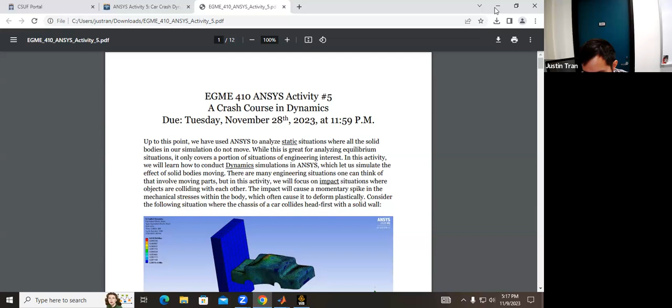Oh, that's good. Nothing to do with engineering, but what's it for? That's for the City of Vernon utilities operational training. Okay, he gets back there tomorrow. Yeah, that's good. So I've got to email him to test this. Okay, we have to take a test too, okay.

My cousin works there, or I've got two cousins that work there, and one of them texted me today. Hey, I got information for you, he's like, it's 100 questions. That's almost like a weeding tool then, like who's gonna put up with 100 questions, right? Yeah, and he's like, read up on homes, vehicles that are... He's like, know what a watt is, and megawatt. He's like, okay fine. He's like, that's good, there'll be a lot of uncritical thinking.

We had all day long. Yes, you do. So I am not worried. That's good. Is it, do you have to do it live or do they just give it to you and then I just email back? I would go and I'll go in live. Okay, now that makes sense.

Works out, we may not have to miss any school for it, cause that's coming up. Well, so I don't think, well for the faculty at least, we're not going to strike this semester. What I saw was the week after this break, it's only going to be select campuses. So Fullerton was not selected as one of the striking campuses.

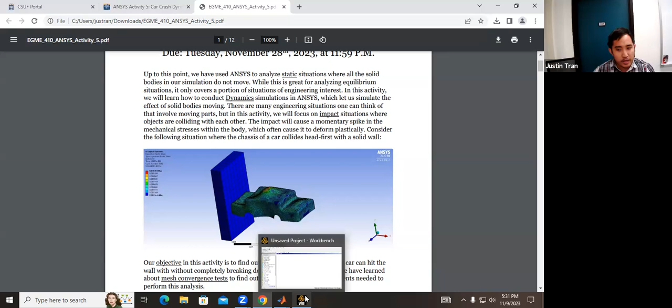Okay, you guys know the drill at this point, so if you haven't already, go ahead and start up ANSYS Workbench. It takes a couple minutes to do so. While you guys are starting it up, I'll give a little bit of introduction on the activity, and then we'll get started.

In terms of length, this activity is definitely shorter than activity 4. But because the dynamic simulations take a while, you're going to be just kind of sitting there and watching ANSYS run for a good amount of time today. Any questions I can answer before we get started?

Is the optional activity the grad student assignment? It's not—it's going to be part of the grad student assignment, and it will be part of the final project. We'll talk about the final project after Thanksgiving.

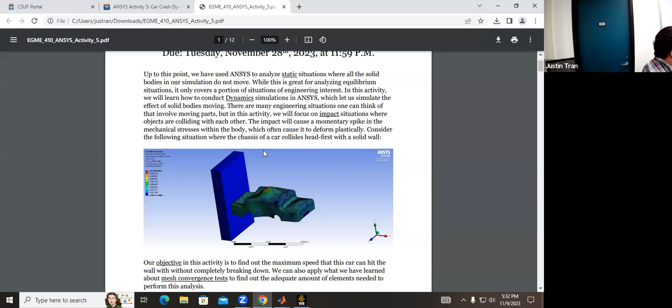Yeah, you guys have enough on your plate—ANSYS activity, problem set, and midterm—so I didn't want to overload you guys with the final project just yet. Also, the due date for this activity is not until after Thanksgiving, so it's going to be Tuesday, November 28th, the Tuesday we come back from Thanksgiving.

All right, any other questions before we get started? Okay, so this is the activity here, and just like before, not only do you need to start up ANSYS, but make sure you go to Canvas and download the CAD file.

For the CAD file, I'm giving you 2 options, just because one year—I don't know if it was just the version of ANSYS we were using—but some people had trouble loading the file. So I have both an IGS version and a step version of the CAD file. You only need one, but if one doesn't work, check the other. For most people, the IGS file should work, but if you're having trouble or errors loading it, you can use the step file instead.

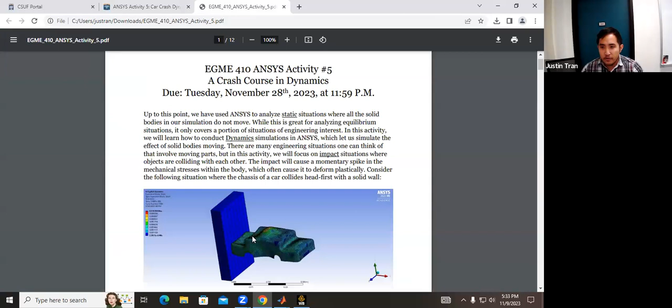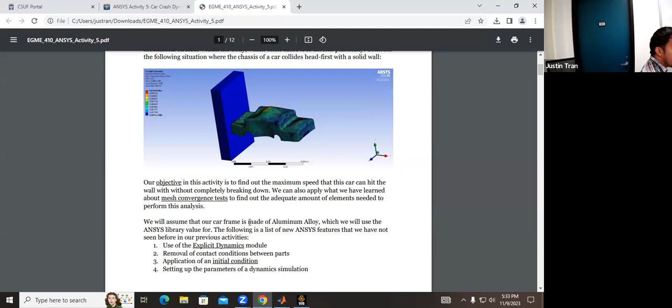Okay, so let's talk a little bit about the activity. Just like we mentioned before, we're going to be using the explicit dynamics package within ANSYS. We talked on Tuesday about kind of what this is, and we're going to be using it to simulate this car crash.

Hopefully you guys have opened up ANSYS already. From ANSYS Workbench, we're going to load in the explicit dynamics module. From the left-hand side, you're going to go to explicit dynamics—you can double click it, or click and drag it to the center schematic there.

All right, and just like before, we're going to right click on geometry and import a geometry. You're going to import the car crash CAD file that you hopefully have downloaded from Canvas. As long as the geometry works, it should load without any issues.

All right, so the first thing we're going to do before we jump into ANSYS Mechanical is add new material properties. According to the project specifications, the car we're going to be using is going to be made out of aluminum, so we want to make sure we add that. Hopefully you guys remember how to add a custom material property.

To do that, we're going to double click on engineering data and open up the engineering data sources. We're not going to add a custom material here, we're just going to use one that's within the ANSYS database. So click on this button near the top called engineering data sources.

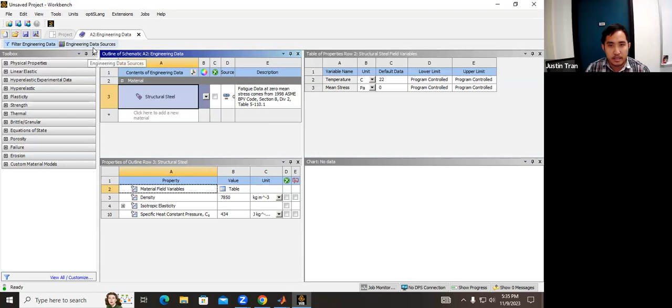Then it should be under general materials. Let me close this so you can see. Where's general materials? I always have trouble finding it. There it is, general materials. Okay, so under general materials here, these are kind of the standard materials for structural mechanics.

We're going to add two materials. First, we're going to add aluminum alloy, a standard alloy for aluminum. It may not be exactly the type we want, but it's going to be pretty close. So we're going to click on the plus sign, and after that the aluminum alloy should be added to your project.

The other material we're going to add is polyethylene, just for fun, to see how our results change if we have a plastic car. Let's add that to the project as well. So you should have three materials overall: structural steel, polyethylene, and aluminum alloy.

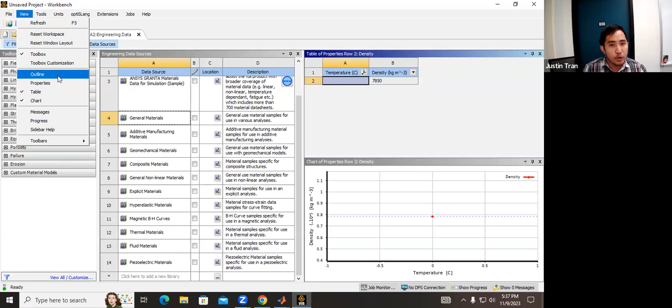Any questions on that so far? One student says they don't have a window with the other materials showing. With the other materials, you may have to reset the view. Did you click on engineering data sources and then general material? But this window here isn't showing. Let's see, you could try reset workspace or reset the window layout, or it might be one of these. I think you might have to do outline. Yeah, click view and then outline, and that should show the list of materials at the bottom. Okay, I'll come back to you, Chris.

Got it, okay. So for everyone else, if you've added the materials, let's go ahead and open up ANSYS Mechanical. Let's exit out of this and double click on model. This is going to open up ANSYS Mechanical and give us the main window we're going to use for today.

Once you open up ANSYS Mechanical, you should see a window like this, and you can see our geometry here. We have two parts of our assembly: one part consists of the wall, that's part two, and then we have a separate part for the car, that's part one. We're going to go through the standard procedures of setting the mesh and boundary conditions, and you'll see we're going to have some extra steps for the dynamic simulation.

But the first thing we're going to do is eliminate the connections between these two parts. Just like any assembly we've loaded in ANSYS, because these two parts are very close to each other and basically already touching, ANSYS has created a standard connection between them. If you click on this contact region between the two parts, go to connections, contacts, and contact region, you can see from this setting that it's set these two parts to bonded.

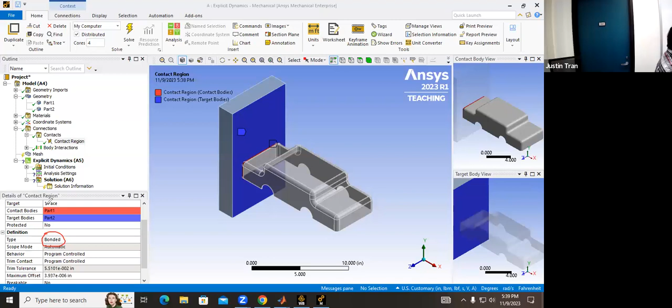Right now the front of the car is basically welded to the wall, and that's only because ANSYS doesn't recognize this as a car crash simulation. ANSYS sees that these two parts are really close together, so it bonds them together to make sure they stay that way. But of course, we don't want that. We don't want our car bonded to the wall, so we need to eliminate this contact region.

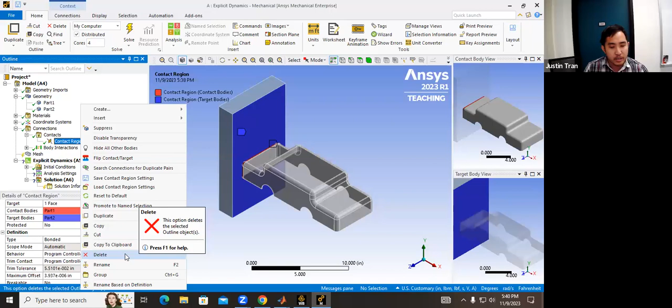You're going to right click this contact region and just delete it. Deleting it will make sure that the two parts no longer have any connection, so the car is free to hit the wall and bounce off, which is what we want. Then we can go from there. So before we move forward, make sure you delete this contact region between the car and the wall.

Now that the connection is eliminated, let's specify the material properties for our two parts. We have the wall and the car. For the wall, we don't really care what's happening with it in this case—the wall only exists for us to hit it, and it's not expected to deform in any realistic way. So we're going to keep the wall as steel. If you wanted to be more realistic you could make a concrete wall, but steel or concrete, it's going to be basically the same thing.

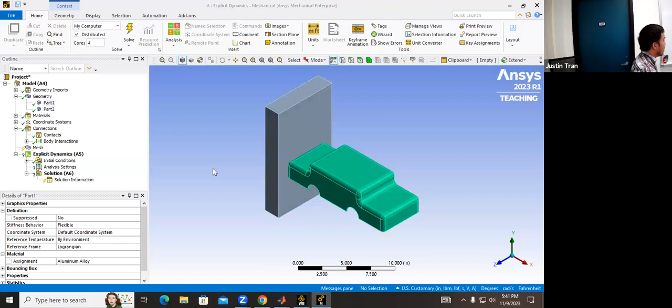The one we mostly have to change here is the car. We're going to change it from structural steel to aluminum alloy. We'll do the simulation with aluminum first, and then we'll do the simulation with plastic after that. So let's switch that to aluminum alloy, and now we are ready to go.

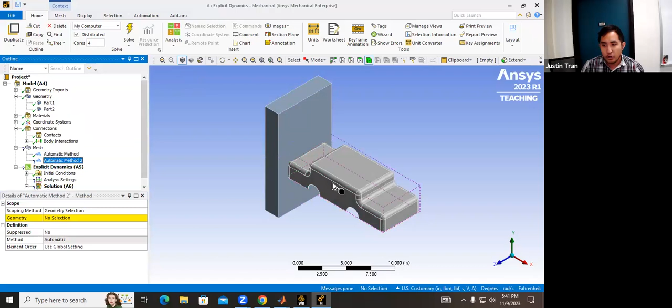First thing we're going to do is mesh. We need to mesh the wall and we need to mesh the car. Let's add two method objects—one for the wall and one for the car. Let me go ahead and rename these so you can see: wall method and car method.

The main thing we have to change here is the element order. Normally, because this is a structural simulation, we want to set the order to quadratic, since that generally leads to more accurate results and helps prevent shear and volume locking. But for dynamic simulation—this is the only time in the class we'll do this—we're actually going to switch the element order to linear. The reason has to do with the cost of the simulation: because dynamic simulations are so expensive, we have to switch to a linear order to reach convergence in a reasonable amount of time. So we're going to set our element order to linear for both the wall and the car.

Next thing we're going to set is the size. Let's go ahead and create sizing objects for both the wall and the car. Let me rename these: this is wall sizing, and this one right here will be car sizing.

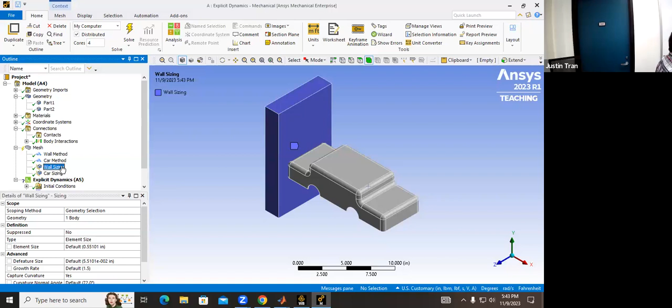Now we need to set mesh settings for the wall and the car. The car is going to be where most of the action takes place—it's going to be the one primarily deforming and under stress, so you want to make sure you have a good mesh density for the car. For the wall, it's not really going to do much here, so we can make a very coarse mesh for it. In fact, you want to do this to maximize mesh density in the car. I'll let you guys play around with it, but let me give an example: set this to 0.2, and maybe set the wall to 1.5. You don't have to copy my exact numbers, so if you missed it, don't worry about it.

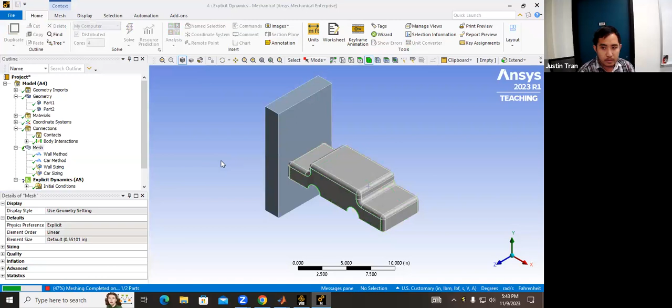Okay, so something like this looks good. And so you can see here the wall is fairly coarse.

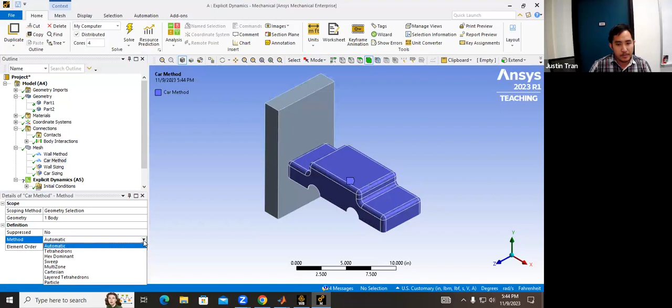So we don't need a lot of mesh density there, but for the car we have a fairly fine mesh. In fact, let me see if I can do hexes on this one. Sometimes the hexes work, sometimes they don't. We'll see if it works for this one.

All right, so I'll give you guys a couple minutes to play around with the mesh settings, but you should have something that looks relatively well refined like this. So your car should have a good amount of density and your wall not so much, okay?

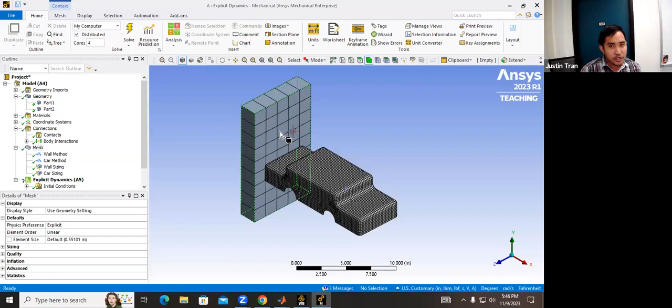Okay, so now that the mesh is complete, the next step is to apply loads and constraints. So there's actually not much to do here. Most of the loads are going to be from the motion, and we're actually not going to apply any explicit forces or any kind of explicit pressures in this case.

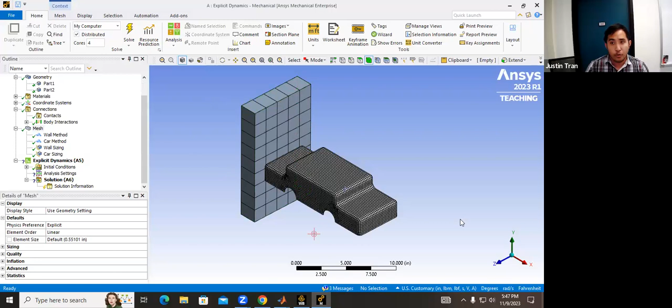The only thing we have to add here is a fixed support for the wall, just to make sure that once the car hits it, the wall is not going to go off into infinity. So let's go ahead and add our fixed supports.

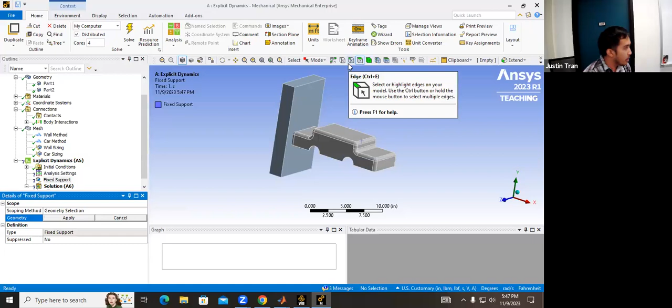So you're going to right click on Explicit Dynamics A5, and you're going to go ahead and add a fixed support. And we want to fix the wall here, but we have to be a little bit careful about how we apply this fixed support.

You don't want to apply the fixed support on a surface like this, because this is the surface that's actually going to be contacting the car. Once the car makes impact with the wall, it's going to compress the wall a little, and that compression is actually going to be really important for stability and realism. So you never want to apply a fixed condition on a part which is going to have an impact, because that's going to cause some issues.

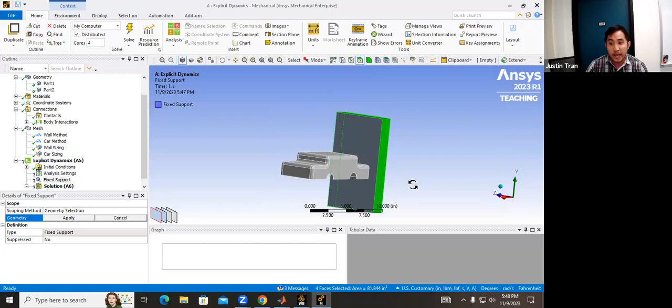So we're going to fix the model around the wall. We're going to apply the fixed supports on all the outer edges of the wall, like that. That basically makes sure that the wall is not going to go anywhere after the crash, but also this front face of the wall is free to indent and deform a little bit, which is going to be an important part of the simulation.

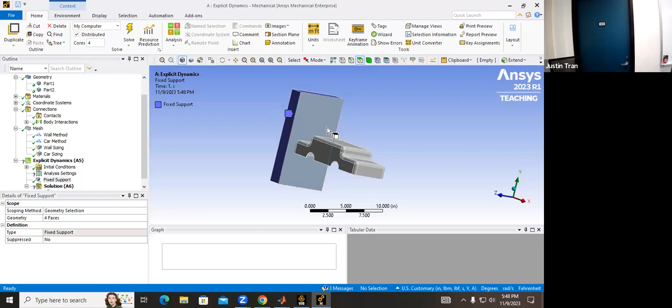Why couldn't we just fix the back half of the wall? You could do that as well, that's another option. Both are going to have very similar effects. You can either fix the back side of the wall or the outer edges.

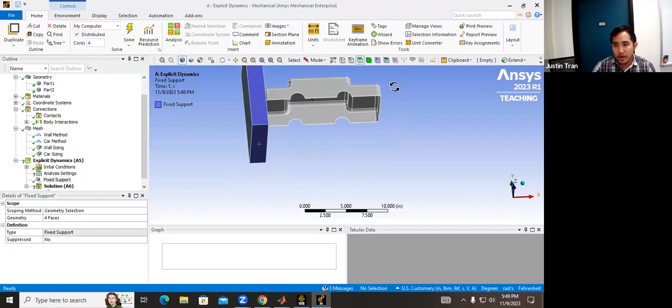Okay, and so we're also going to apply another boundary condition on the car, mostly just to make sure that the car doesn't clip through the ground. So even though we're not simulating the wheels here, we're basically only simulating the shell, and we want to make sure the car doesn't clip through the ground after it crashes.

And so we're going to add a displacement boundary condition. You're going to right click on Explicit Dynamics A5, go to Insert, and then click on Displacement right here.

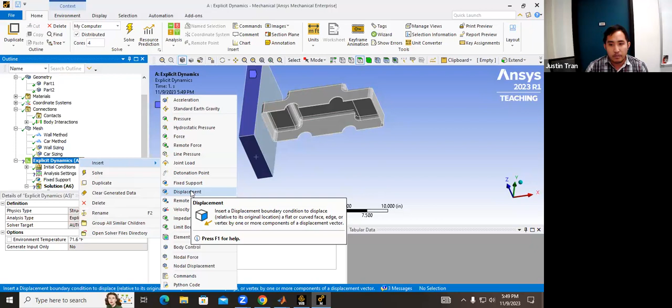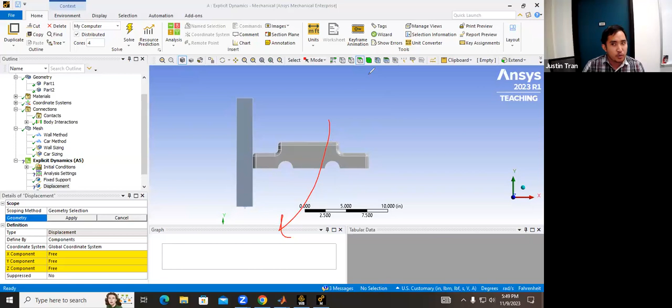And if we rearrange the geometry like this, we can see that the vertical direction for this geometry is in the Y direction. And so we want to make sure that the car doesn't displace in this direction, because normally that's where the ground is, and we want to make sure that doesn't happen.

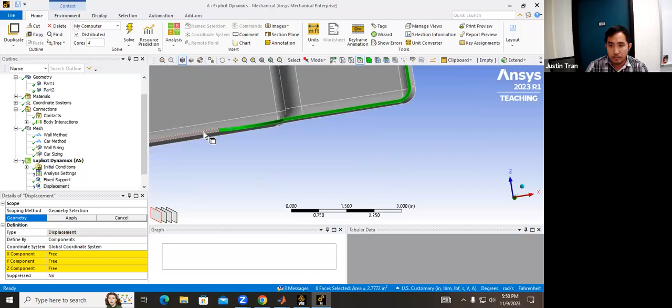There are a few different ways you can do this, but the way we're going to do it here is we're going to click on all the outer edges of the bottom. We're going to go around this entire bottom surface, clicking all of these bottom edges, and apply that for the geometry. So that should be 6 faces.

After you do that, you're going to set the Y component of the displacement here to be 0. The X displacement and the Z displacement, we're going to leave free, because that's going to allow the car to impact the wall. But we just want to make sure that it doesn't apply any displacement in the Y direction, so we're going to set that one to be 0.

Let me go ahead and highlight that part here. So there are 2 boundary conditions that we're applying here. We need to make sure that the wall is not going to move, so we apply our fixed support there. And then we're applying a displacement boundary condition on the bottom edge of the car, just to make sure the car is not going to clip through the ground during the simulation.

Any questions on that? All right, everyone able to apply the 2 boundary conditions? You guys have a question over there? Okay.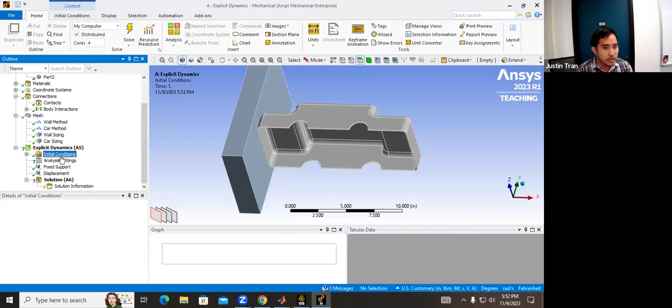So the next step here is normally where we would be able to run the simulation, right? For a static case, the only thing you would need is just the mesh and the boundary conditions. But here we also need the initial conditions. The initial conditions basically tell us what kind of state the simulation is going to be at the beginning of the simulation.

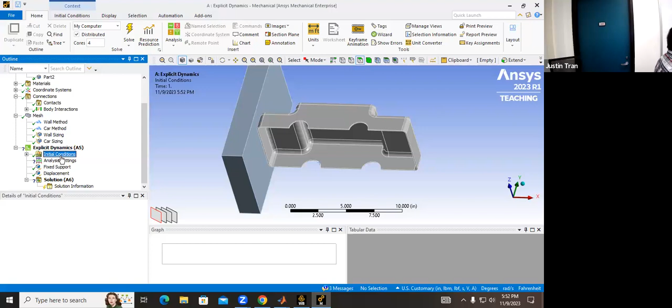Remember the way dynamic simulations work is we're solving this simulation forward in time, and the next step is always dependent on what the previous step looked like. So in order to do that, we have to define what the initial step would look like. Let's go ahead and define these initial conditions here.

This is a new menu that wasn't present in our static simulations. Just like we apply boundary conditions, you're going to right click on initial conditions, insert, and we're going to have one initial condition for the velocity.

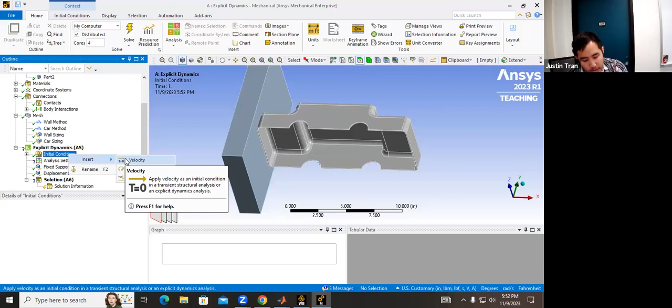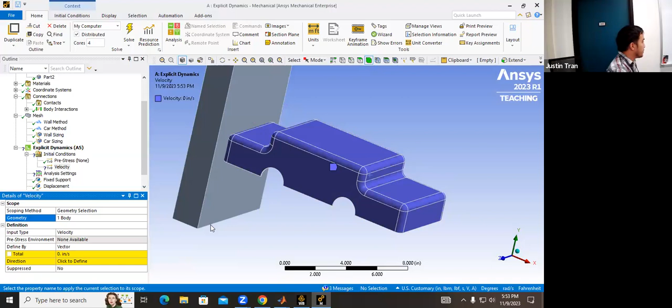Because the way we're going to simulate the car crash is we're going to give this car an initial velocity and have it headed towards the wall. You're going to select the entire car geometry here, so that's your geometry for the velocity. And we want to apply that velocity in the negative X direction, because the negative X direction is going to head the car towards the wall.

So we're going to switch this defined by to components, and we're going to apply this velocity going towards the wall. So you want to make sure that your X component of the velocity here is negative. We'll give it just a sample value for now.

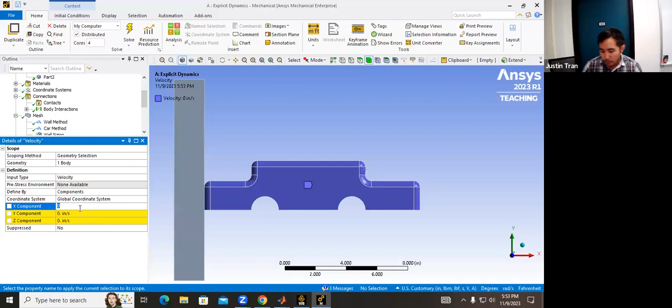Keep in mind that the default settings here is in inches per second. So let's give it a default velocity of minus 5,000 inches per second, which is not that fast — actually it's going to be not that fast. We'll see. So we'll start with that, and then we'll play with that velocity as we go.

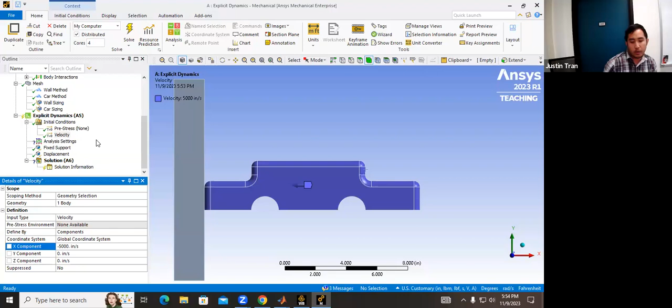Now that we have the initial velocity, the only thing we have to specify now is the analysis settings right here. The settings we have to set have to do with the time step. If you remember from class on Tuesday, when you're doing a dynamic simulation, you have to specify two things: the time step size, and the ending time for the simulation. Remember, in ANSYS, ANSYS is going to specify the time step size for you.

The only thing you have to specify here is just the ending time — how much time you want the simulation to simulate. Since we're simulating a car crash, it's all going to happen very quickly, so we don't have to set a high end time at all. Let's set something really small, like 0.05. For this first one, it doesn't matter all too much, just because we're going relatively slowly.

Okay, so now that you have the end time, we have the mesh, we have the boundary conditions, we have the initial conditions. The last step here is just to run the simulation.

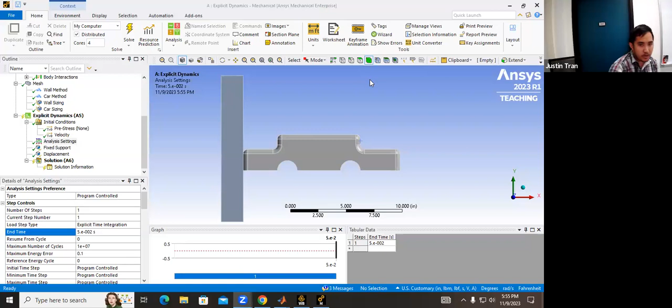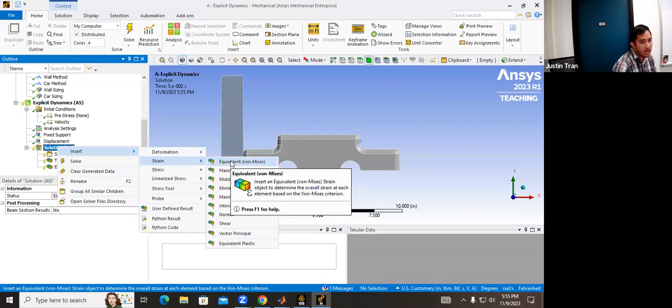Before we run the simulation, we want to make sure we specify our outputs. Let's go ahead and put in our usual suspects: the total deformation, the equivalent stress, and let's also add the equivalent strain. Okay, so we've got both equivalent stress and equivalent strain.

With all of those results added, we're ready to run. So let's go ahead and click solve. And now you're going to be doing what you're going to be doing for most of today, which is just sitting around and waiting, because the simulation is going to take a while.

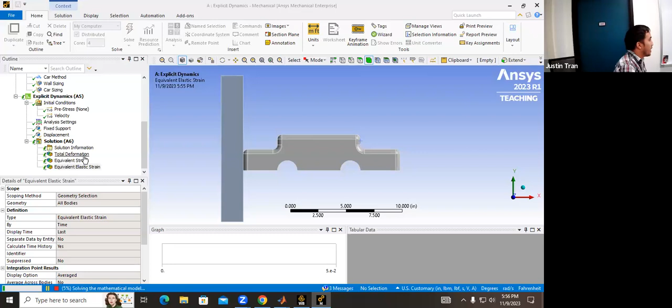You can check the progress of the simulation in the bottom left corner of the screen right here. Basically this progress bar is going to fill as the simulation finishes. But actually, let me show you something, so you don't have to just wait and watch Thursday Night Football while this is going on. Let's go ahead and click on solution information here.

After you click on solution information, what you're going to see is a bunch of numbers. These numbers indicate how the simulation is going. If you're kind of savvy with finite element theory and what's going on, you can read those numbers. But what I want to show you here is not the solver output, it's this energy summary.

Go ahead and click on energy summary, and what that's going to do is bring up a graph like this.

This is pretty cool, because it's basically showing you all the different energies that are inside your system and how they're evolving as a function of time. In particular, you should look at these two energies here. In blue, we have the kinetic energy, which is the energy of motion. And in purple here, we have something called internal energy, which is the energy that's being entered into the system as the car deforms. As the car deforms, the internal energy of the system is going to go up.

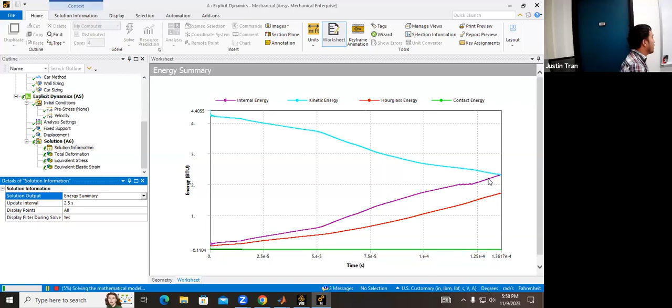What you're seeing here is that as the car crashes into the wall, its kinetic energy starts to go down, because as the car impacts the wall, it's going to start to slow down. In fact, it's just going to stop as it hits the wall. And then the internal energy is going up at the same time, because as the car hits the wall and impacts it, the car is going to start deforming.

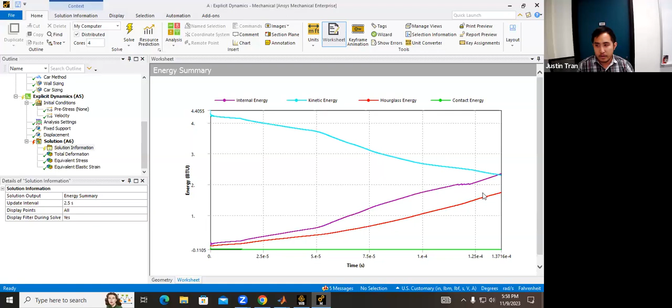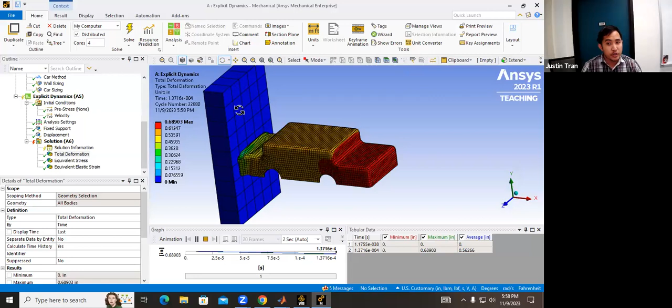Oops, looks like we have an energy error. Okay, that's cool, I've never actually seen this before. So we had an error here, and the error was that the energy, the internal energy I think, got a little bit too big. So I think the deformations were a little bit too large.

So let's actually lower the velocity here and see what that's going to do. Instead of minus 5,000, let's set it to minus 500. Okay, so I'm going to rerun the simulation with an initial velocity of 500, and that should help lower the total amount of energy in the system.

Okay, so I'll let you guys play around with this for a little bit, but go ahead and try different velocities and different end times, and see if you can get a result that looks like in the document. I'll let you guys play around with this for maybe 15, 20 minutes, and then we'll reconvene and talk about the rest of the activity.

Mine keeps getting off. Yeah, it should do that. It should kind of bounce off and just almost wiggle back and forth.

The simulation could take anywhere between 2 to 3 to 5 minutes usually.

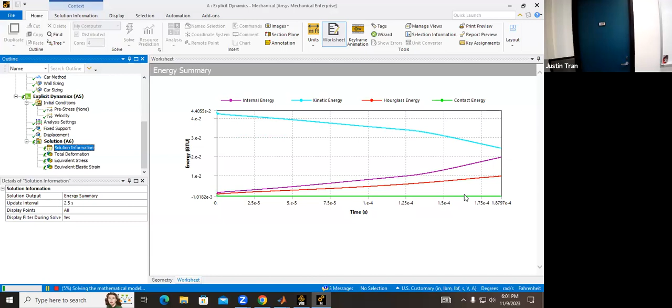Yes, so the initial impact is the first hit. It's up there, and then maybe the plate does this - this is kind of the vibration. Now, yeah, but this...

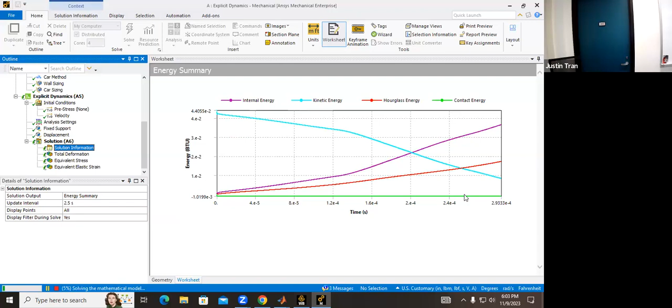That's okay, this one is, yeah. The energy chart - it should do that. So you should start to see after the initial impact, you should see it basically vibrate. Okay, yeah, good, right? Yes. Up to this point I've always had something go wrong. I'm gonna kill this one.

Actually make this a little bit smaller. Let me change the units here. Yeah, what's up? No, that's what's supposed to happen. So you should see basically what you see here.

So technically, most of that happened right here - this initial dip, and then all it's doing from here is just vibration. The car can't do much else, so all we can do is basically vibrate. All that's happening right now is the car hit it and bounced off and just kind of vibrated. But no, that's right.

Yeah, and so the end time that was set here was actually very long, so you could kill this thing. If you want to kill it, you can click on that - it's gonna take a minute. And you can set the time to anything, like 5 minutes.

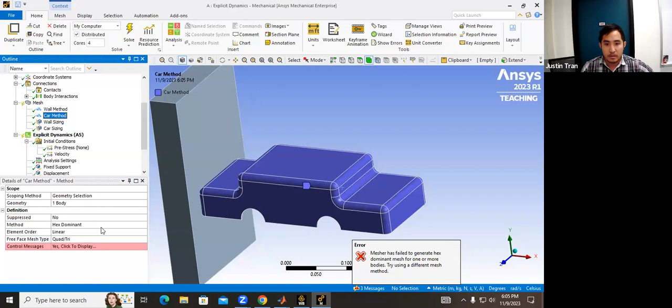We put our pictures into the report - it doesn't matter where we have our car, doesn't matter. I know you just grade them off of completion, but I don't want to... Oh yeah, yeah, oh that's good.

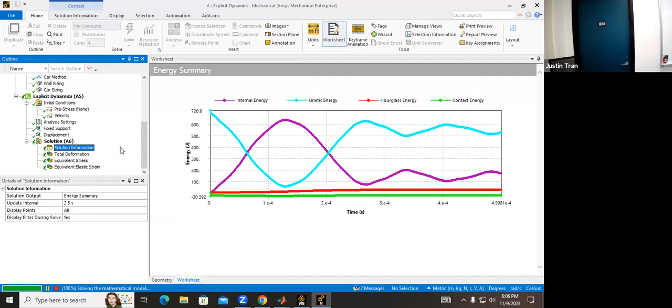So I did a couple of things. It might be an issue with the hexahedral elements, so you can try changing it to tetrahedrons if your mesh isn't already. And then what I did was increase the initial velocity - I changed it to meters per second, and changed it to -50. Yeah, and then your end time here, you want to make sure this is actually pretty small, so reduce it to like 5 times 10 to the -4.

Okay, and if you think of the units, what's the unit for the car element size? I did 7.5 times 10 to the -3 meters. So it changes to inches - it's about 0.3 inches apart. So, like 0.3 inches, and what were the other unit sizes? And the initial velocity, maybe set it to be something around -2,000 inches per second.

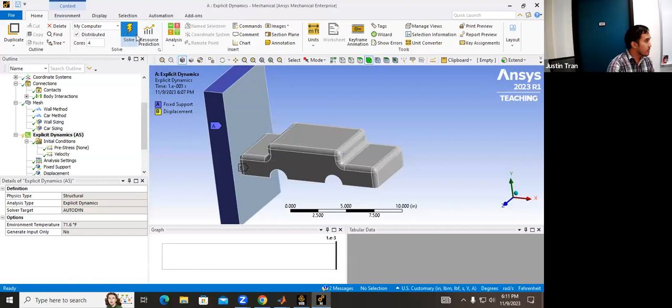Sorry, yeah, you're in. Again, so the end time I have is, well, I changed it a little bit, so I increased it a little bit, it's 1 times 10 to the minus 3.

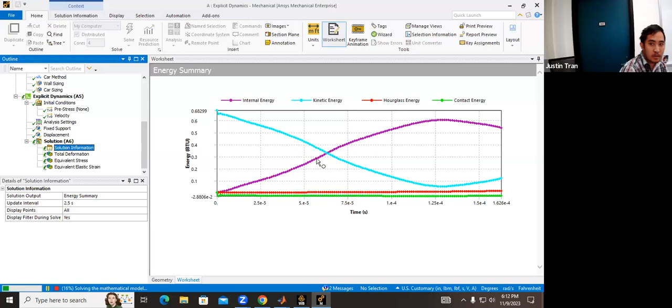Get this done early, huh? We get this done early. Yeah, no, this one's very short, it's a short one, at the end of the semester, so you guys have a lot of... I had 2 projects, 3 projects. One I got.

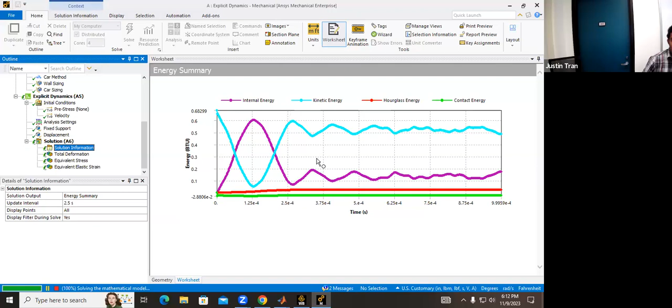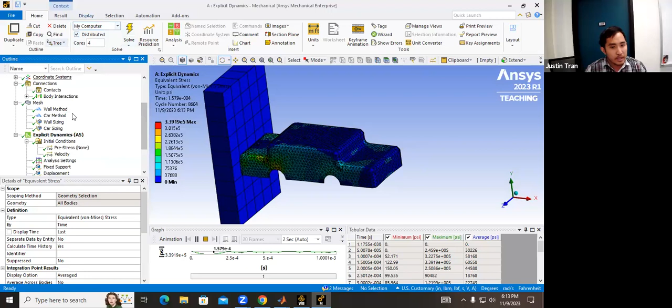All right, so I got it to work, guys. So if you're having trouble getting it to work, you can try to make these changes, okay? I think one thing that might be an issue is actually the hexahedral elements, and so if you're having trouble with the hexahedral elements, you can try changing to tetrahedrons, and that should help. The other thing you can change is making sure that your end time is actually not too large. So if I go to analysis settings here, I set my end time to be about 1 millisecond, so 0.001 seconds.

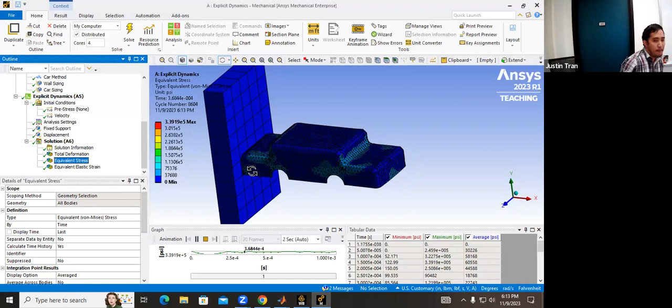If you're having trouble getting these results, when you play the animation, it should look something like this. Your car should impact, and then after that it should just kind of vibrate, like that, right? And then the energy summary should look something like this, where you have the initial impact, and the initial impact happens when the kinetic energy dips down, okay? And then from there it kind of comes back up and then you have this kind of wiggling stuff, right?

So the exact pattern of wiggling is gonna look different for everybody, and it doesn't have to look exactly like this, but as long as it kind of has that general behavior where you clearly see the initial impact and some vibration afterwards, that's what you should be looking for in this project, okay? So play with the settings a little bit, try to get your car crash to look like this essentially.

So the hourglass energy is kind of like a fictitious energy, energy that's stored in a mesh. It's a very interesting thing. I think you saw earlier when I was getting errors, the hourglass energy was growing. That's because when the impact happened, a lot of the energy was stored in the structure, stored numerically in the mesh, which is an error. So it's actually good that you track it, because if it gets too high, you know you have some issues. It should stay controlled, kind of your bottom line.

And the contact energy is kind of like friction between the parts. Any energy that comes from the contact itself, that should be very close to zero.

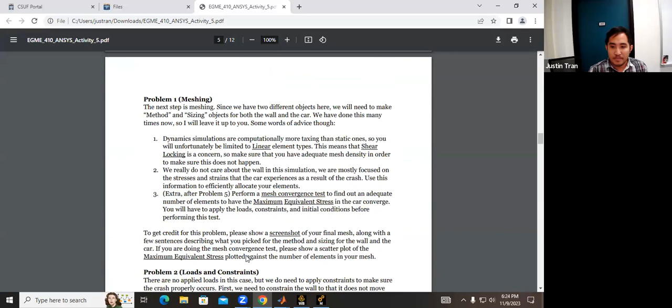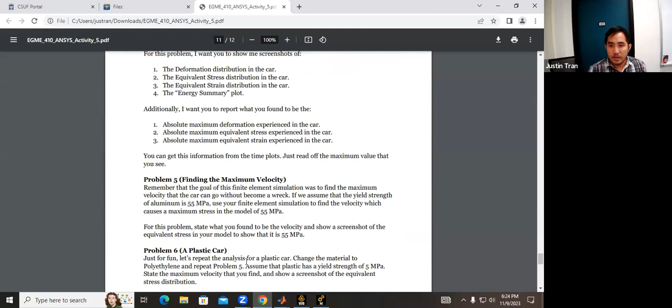All right, so we've got about 20 minutes left in class, so I at least want to tell you guys what's remaining in the activity. This activity is not very long, definitely shorter than activity 4. There's just a couple extra parts here at the end, okay?

So for problem 5, I want you guys to find the maximum velocity of the car that it can handle before it totally fails, okay? We're going to assume that aluminum alloy has a yield strength of 55 megapascals. I want you to run successive simulations with different starting velocities until you get an equivalent stress around 55, okay? Don't stress too much because these simulations take a while to run, so you don't have to get it exactly 55 on the nose. If it's plus or minus 5, that's fine with me. Something between 50 and 60 megapascals is fine, don't stress too much trying to hit exactly 55 because you'll be sitting at your computer for a long time.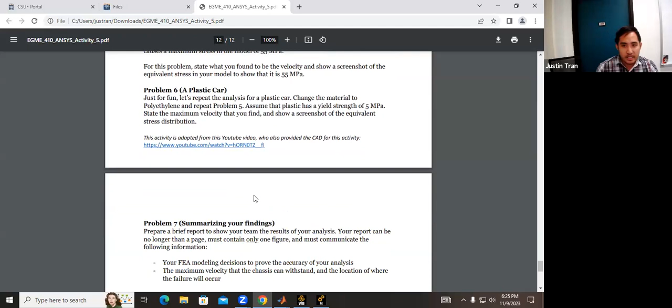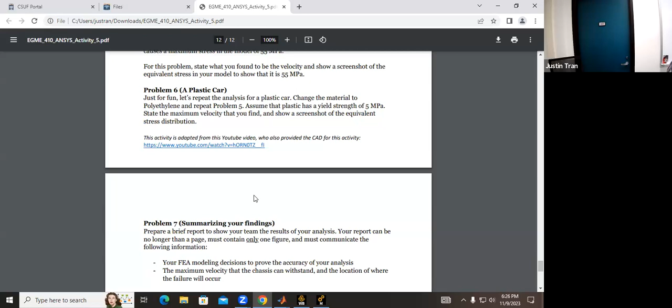Okay, and then for problem 6, I want you to repeat that, except change the material properties of the car to polyethylene. Remember, from the beginning we added a second material property to the car, and we're going to assume the yield strength of polyethylene is 5 megapascals. So just like before, you're going to find the maximum speed until you reach about 5, and again don't stress too much about it—just get close, anywhere between 3 and 7 megapascals will be fine. And then you have the standard summary after that.

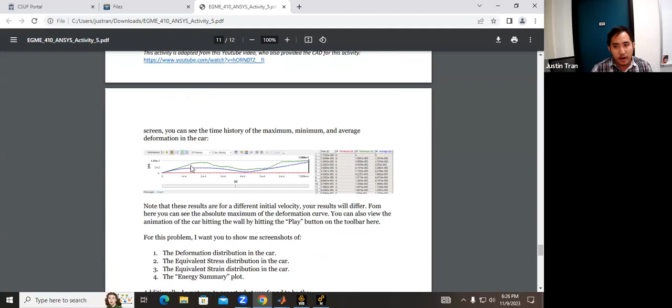And that's the activity, and we did the vast majority of it. So if you've already gotten this far, you can spend the rest of today playing around with the speed. But besides that, I won't keep you guys any further. I know you have a lot of things to study for and do, so I'll stick around until 6:45 of course, but if you guys are heading out, thank you for coming this week.

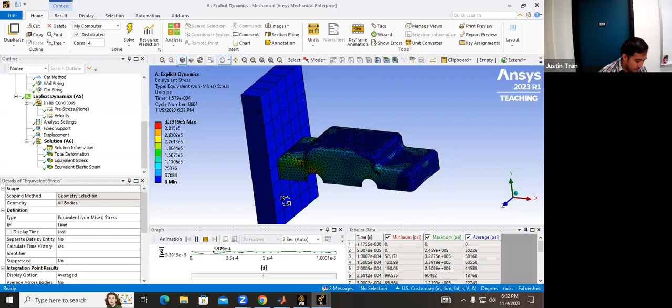Yeah, I'm not gonna like...

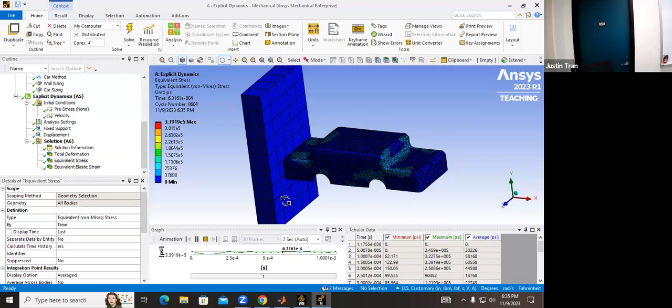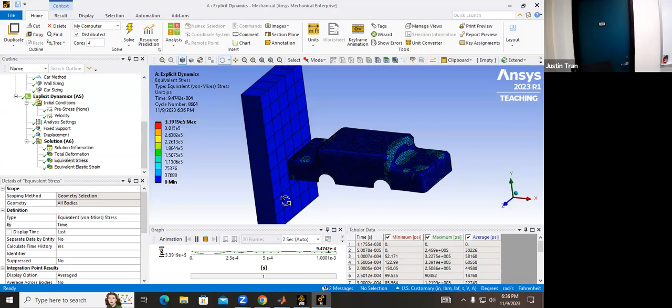We want to get the angle with respect to the positive x-axis. We always rotate counterclockwise to get into that position. But the interesting thing is it's for 315 versus 45 - I think you get the same answer, the signs are still the same.

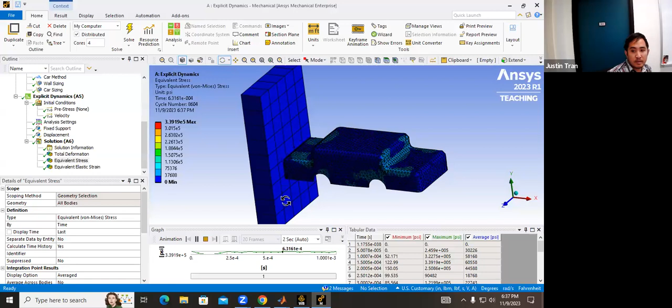I know you are. Yeah, did you tell your phone?

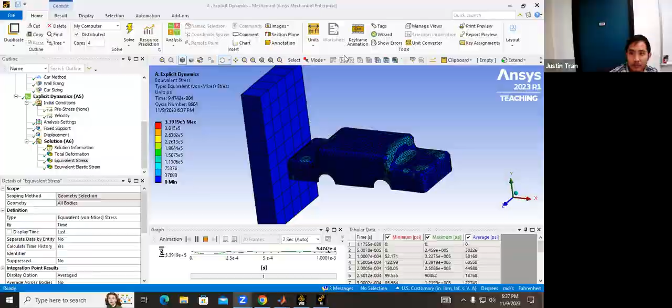Okay, when you use the bus... oh, you lost it? Oh, you left it at the library, huh? Oh, you left it in the house? The library, yeah I think. How do you go? No, not today, no, I'm talking about the old one. Yeah, you got the new one? I didn't.